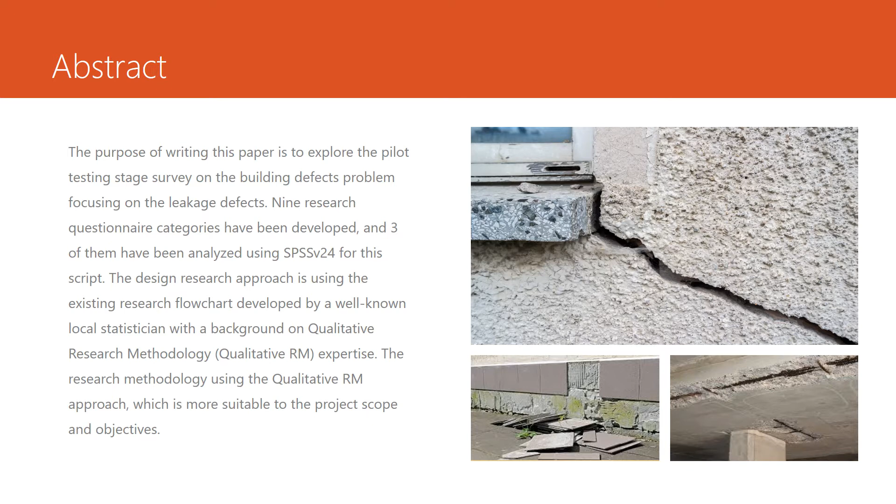The research somehow found out that BLD, building leakage defects, is the main problem within the construction scenario in Malaysia, as well as in most parts of the world, and construction players must actively participate to curb down this BLD to formulate quality buildings.

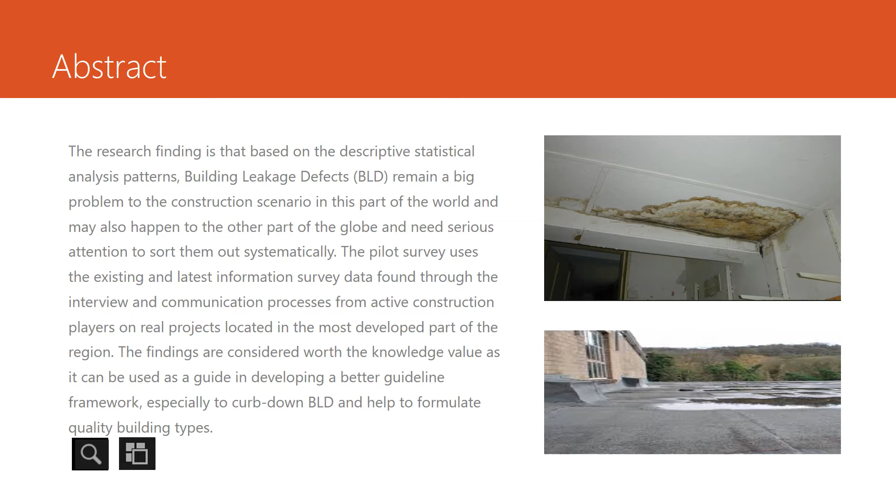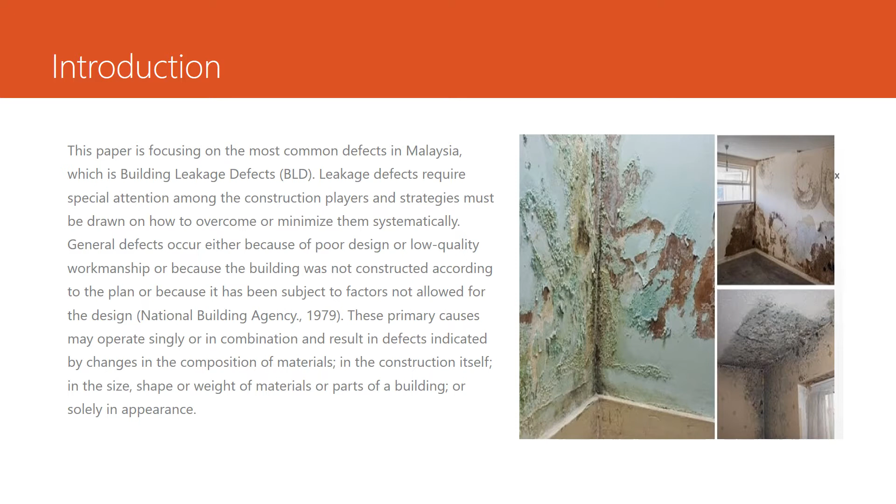From the literature research, information from the National Building Agency mentions that poor design and low quality workmanship are part of the factors allowing these defects to happen. Also, buildings not constructed according to plan is a factor causing defects. So here I use one of the local statistics experts.

This is the research flowchart. I'm using this, it's quite simple to follow, and I think it's ideal for my pilot testing. It shows how important the pilot testing is to contribute to the real survey later on. If the pilot test doesn't really work, the whole study later on, the real study, may not get a good result.

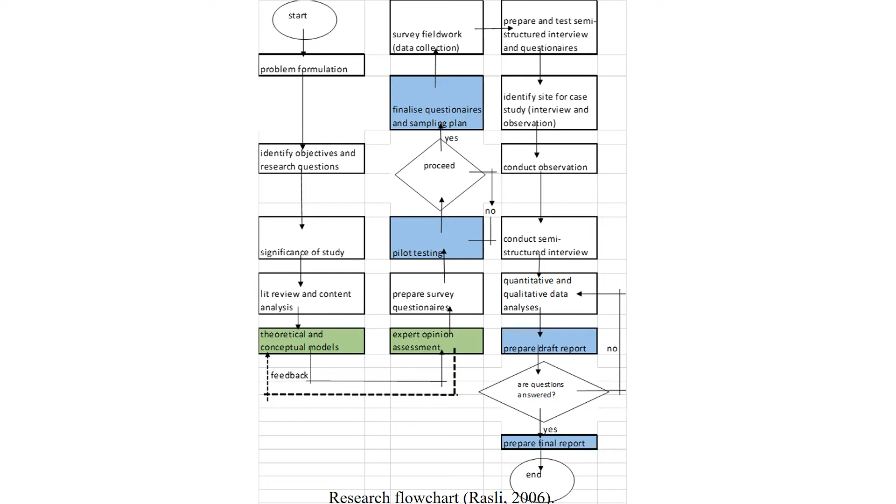This is a diagram that I've made, roughly on these 3 segments that represent the construction process, potentially generating defects: in the design phase, in terms of the product, and after the construction. You can take a look at so many varieties of the building construction process that generate defects.

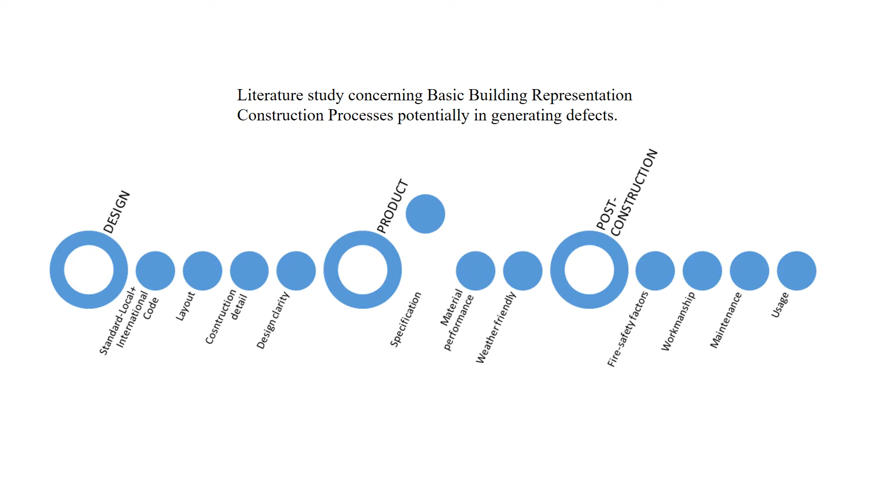These are the 9 questionnaires that I developed, targeting the industry players. For example, how these defects affected the internal areas, the cost of it, estimated value, in fact the impact on the money sector, economic factor, material use, and so on.

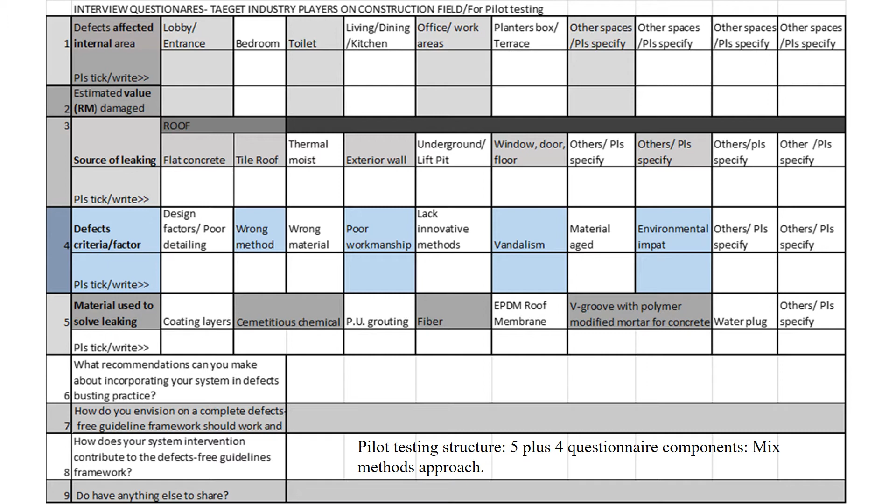This is the questionnaire. The methodology used here is mostly an online questionnaire, which is a quantitative method. This is the categories. You can have these slides, you can take a look at these slides.

The Likert scale, and then I chose 3 questions: questionnaire number 3, 4, and 5, which have a range of the projects they were involved in within a 10 year period: 5,000, 50,000, and so on, up until 1 million.

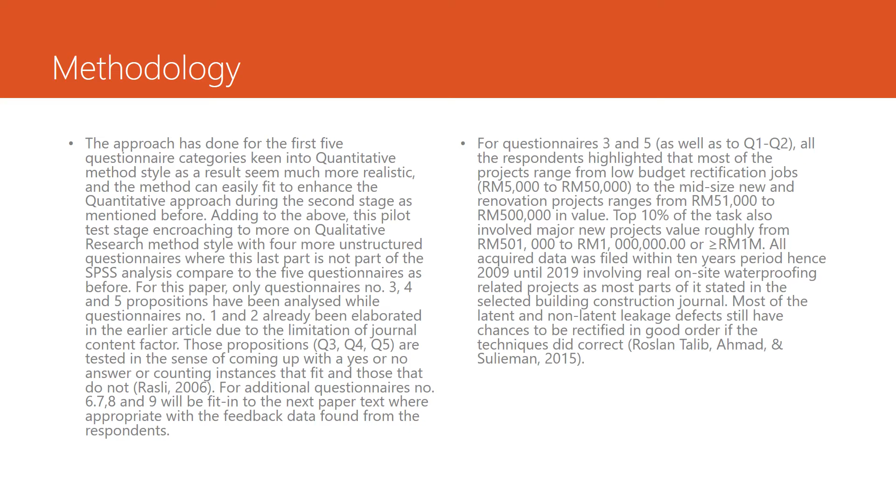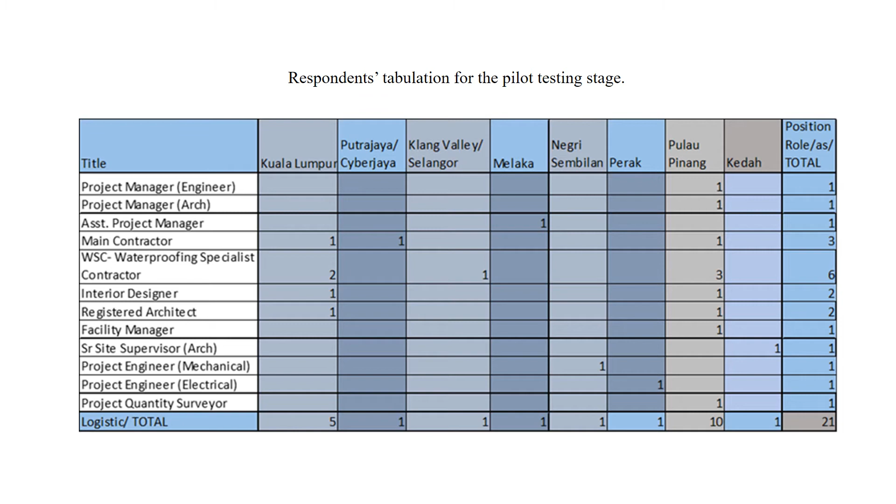We have here 21 respondents in Malaysia, most of them in Penang, 5 in Kuala Lumpur. It ranges from project managers to site engineers, site supervisors, project engineers, main contractors, including WSC, waterproofing specialist contractors, which is the highest with 6.

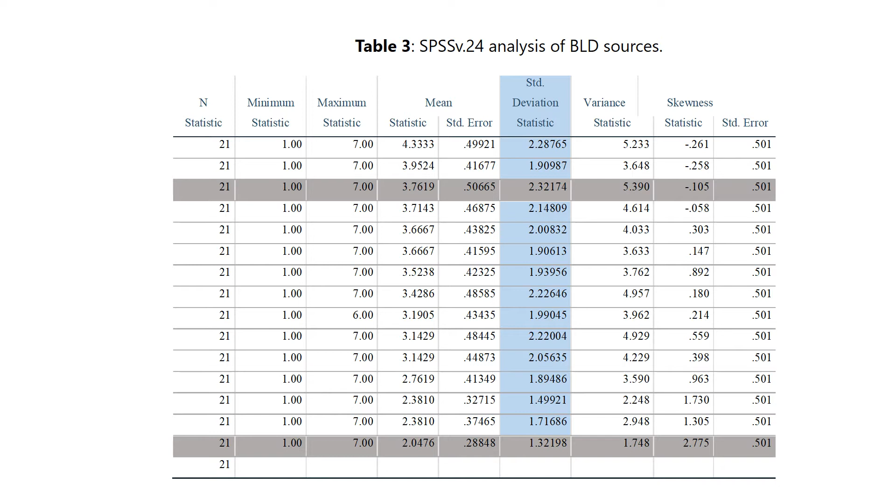Now we have table 3, 4, and 5. This is the first table: analysis on the BLD, building leakage defects. We have here the mean, the standard deviation, variance, and skewness analysis from n equal to [21].

Here is described the SD part. You can read here that the result shows spaces having roofs using tiling type roof tile have the most defect problems on leakage issues, regardless of roof using metal roofing, clay roof tile, concrete roof tile, things like that. This gives the biggest problem from this SD analysis, you can look through that.

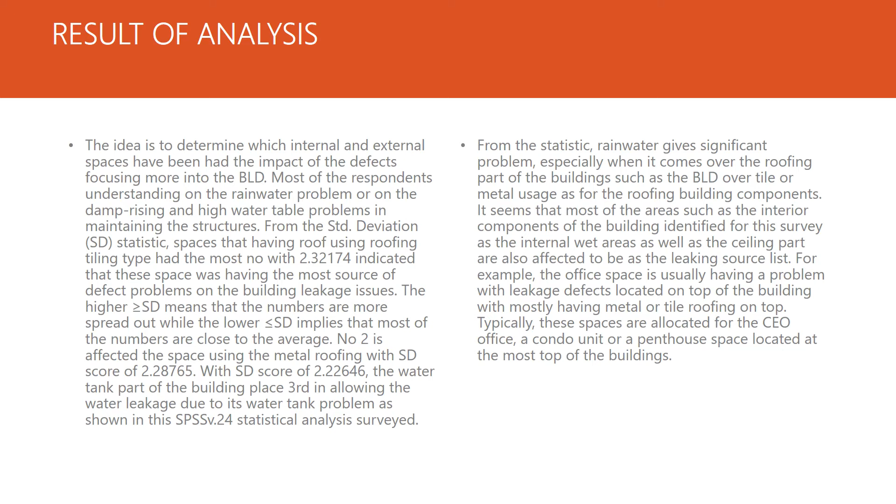Next is on this water tank part, things like that, from these 21 participants. This mean indicates, the mean study here, x equal 4.333, indicating the most problematic part is the metal roofing. I think this is because it's easily rusty, not easy to maintain.

Design-wise, not too steep, so the water doesn't really run through. Number 2 in this main study of the SPSS statistics is again external wall.

The third one is the roof tile again, with the X score of 3.7619. Seems like here the CFR, the concrete flat roof, and the aircon piping system, the water piping system, also prove to give quite a bad impact, giving more problems with defects, from the skewness statistic.

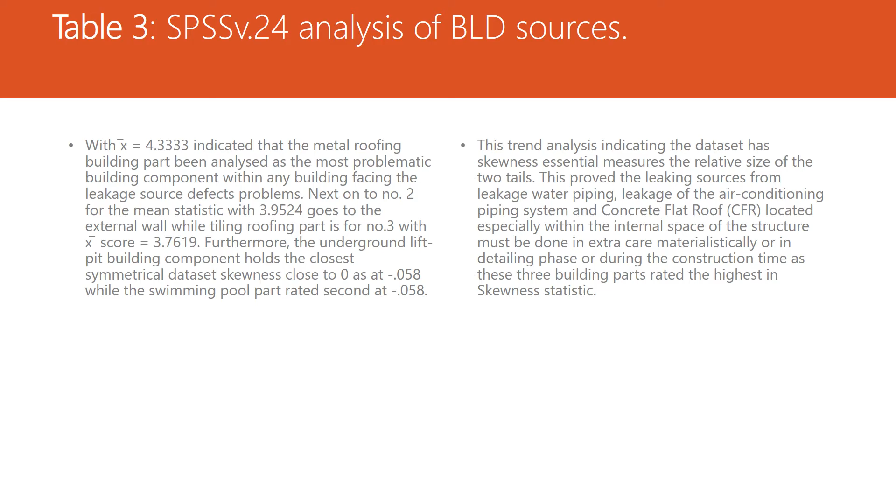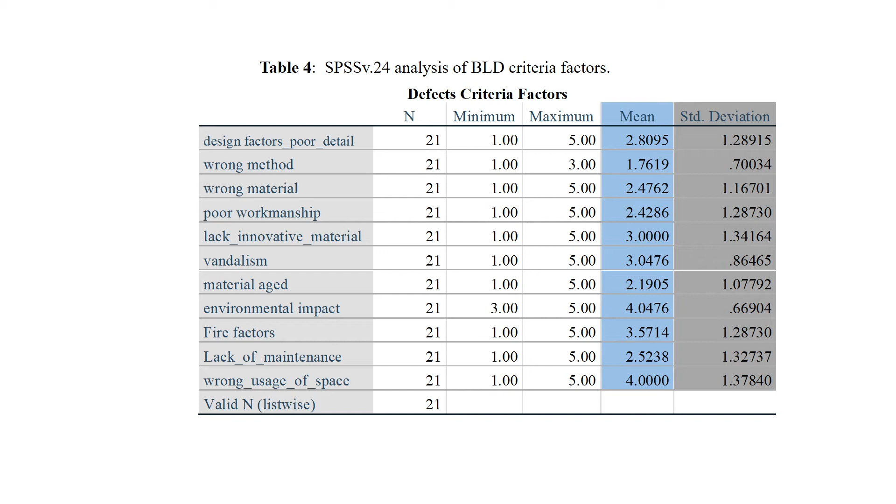The next table, number 4, is the second table, defect criteria from the BLD, building leakage defects. You can see here all the categories from the design factors: poor detailing, wrong method, wrong material, poor workmanship, and so on, including the 5 factors: lack of maintenance, wrong usage of space, meaning the designer, the architect, designs for something like an office that becomes a store, for example. So heavy material is being used, and it gives defects to the internal space.

So still maintaining n equal 21, participants equal 21. You can read here that the standard deviation shows the most things come from the lack of usage of innovative material. They don't really have a good innovative system and methods to do the details and so on, lacking maintenance, and so on. Here you can see the list.

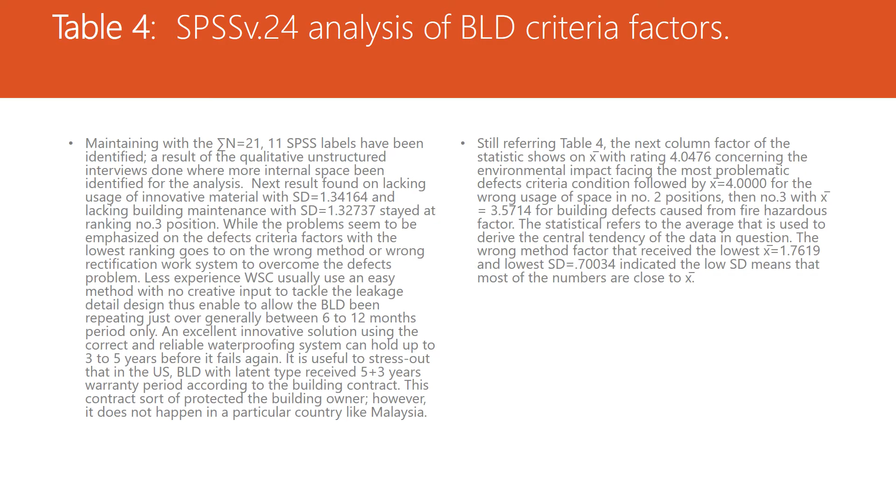This is the third one, table number 5, the last one on the materials to solve the leakage. When we have BLD, building leakage defects, somehow it's used material from coating layers: cementitious, liquid chemical, PU grouting, fiber, EPDM, V-groove, water plug.

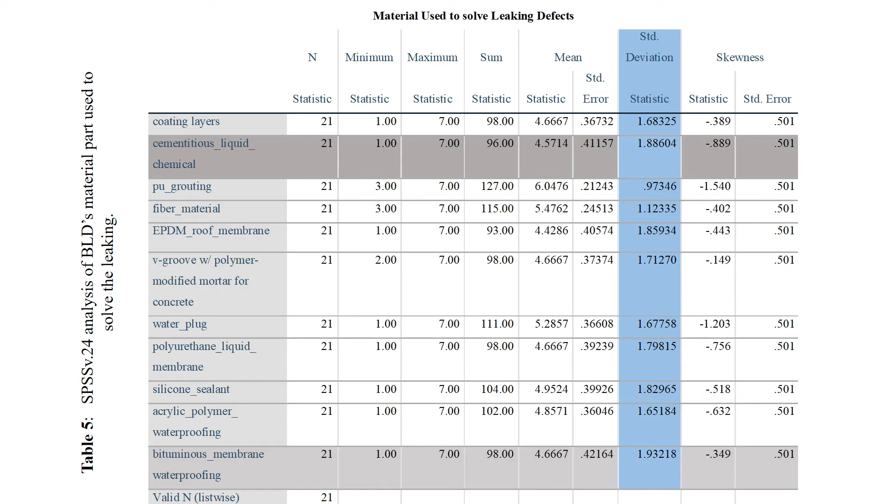PU, membrane, silicone sealant, and so on. You can take a look here, the means, SD and equation. Seems like the most problematic for the defects is BWM, bituminous waterproofing membrane, a typical material covering up the CFR, the most problematic, with the SD equal

1.93218. Seems like we have a big problem here with this membrane, as well as the next column, the cementitious liquid chemical, CLC, with SD of 1.88. So both the membrane and the liquid chemical have problems, especially on the CFR.

From the statistical analysis, it seems there are tremendous problems that the real research must look into from this pilot study, on how the CFR has been tackled, regardless whether the material comes from France, like AXTER, or local material.

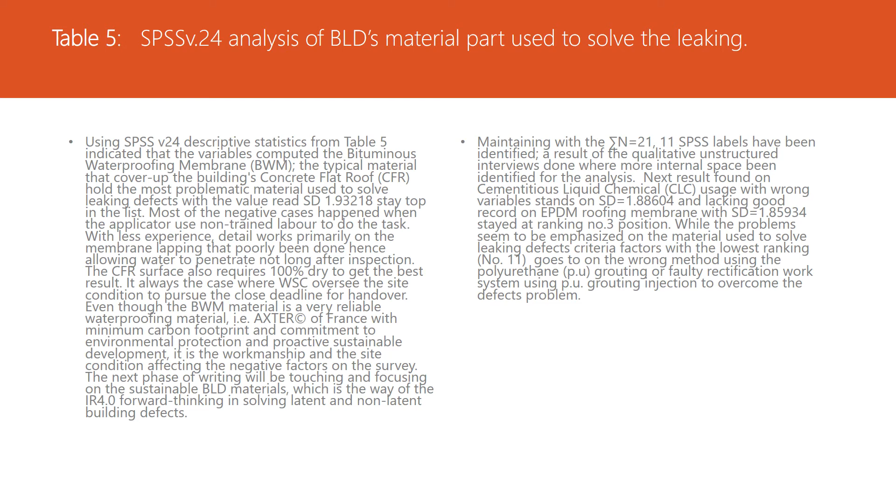You can read here again from table 5. The mean rating of 6.04 is the most problematic, the PU grouting. To me this is a temporary measure to tackle the problem, that's why it's been placed first, the most problematic one.

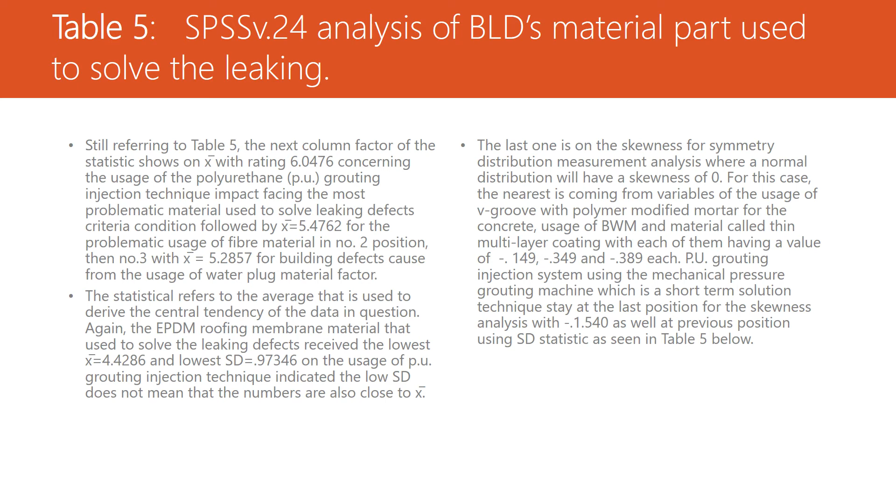And the skewness studies statistics from here indicate there's a problem with the polymer modified mortar for the concrete, and also the usage of BWM, with all these negative values: negative 0.149, negative 0.349, and so on. Also the PU grouting system still has a problem for the defects from the skewness analysis.

To summarize the discussions, it seems with a total of 37 identified building defects related components and categories, in a 7 to 5 range Likert scale measurement using the 3 tables just now, the pilot testing indicates that 80% of listed variables measured toward the deep problematic range with the BLD and LDS symptom, the leakage defects.

A total of 37 variables show 90% of it affected a defected interior space. 90% of it. And 70% found leaking defects with all the 15 categories, sources, and 11 classes of defect criteria factors.

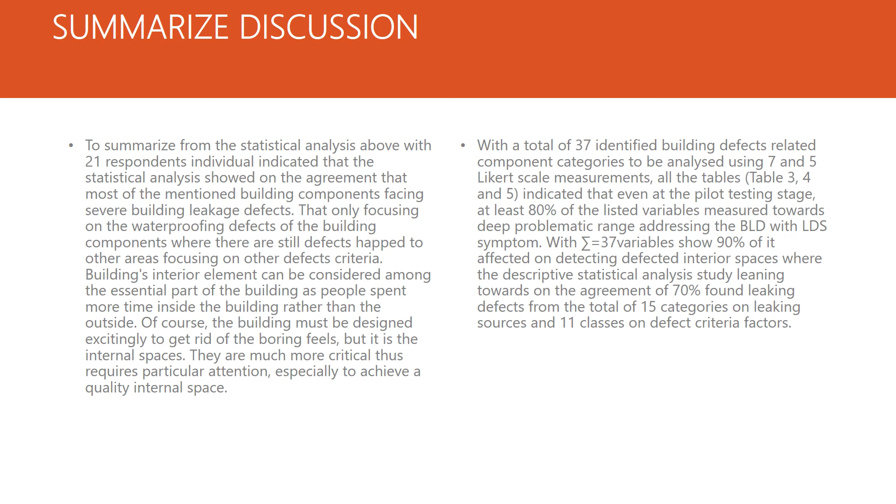So this is how important the pilot study's results are, that they can lead to the real research. Somehow it points out where to go for the real research from this pilot study. Thank you for listening.

Next, on this conclusion part, the leakage defects play a tricky game, as sometimes you can see the fault with naked eyes, sometimes not. Meaning that sometimes it's latent, sometimes it's a non-latent defect game.

It's just like currently this COVID-19. This is a latent defect, you cannot see it. You cannot see this COVID-19, this virus. You cannot see it, it just affects the people, the people die. Same thing with the defects, you cannot see it, it's a latent defect, you cannot see it with the naked eyes.

So people think that the external of the building might look awesome, the external must look good, but they spend more time to develop, while the internal space is bombarded with all kinds of defects, from all angles. This requires a change of mindset of this industry player.

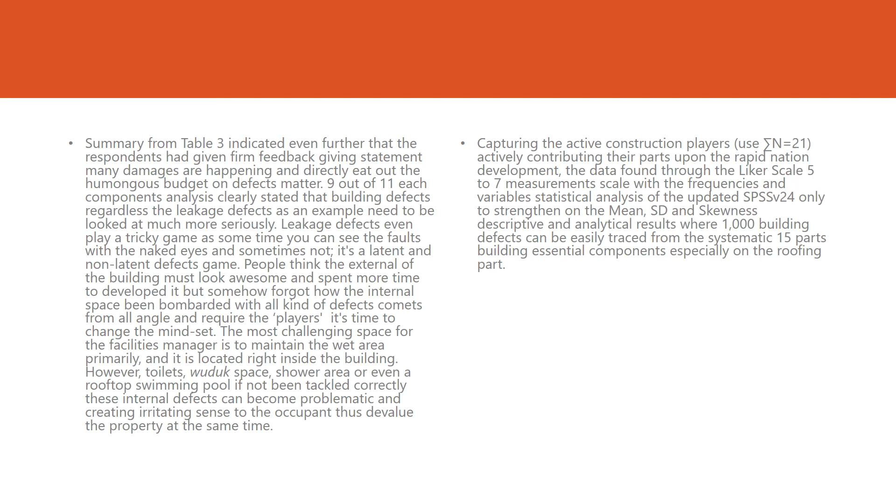You can read through that, like the wet areas in the buildings give a lot of problems. So from the survey of the 21 active contributors to this sector, the Likert scale interviews and so on, with the mean, SD, and skewness descriptive analysis result on about 1,000 building defects from the systematic 15 building parts, the building components, especially on the roofing.

Now, the last part of this conclusion is that the next phase of the study is to refine this pilot test, giving a more comprehensive structure of the real survey, either in mixed mode, quantitative or qualitative approach, and fine-tuning the conceptual model, the RQ or RO, or even the hypothesis, as Schneider mentioned in this book in 1994.

So we hope that from that three-level analysis and the selected questionnaire from those particular 9 variables, survey with the pilot test approach, the pilot test is very important to fine-tune and direct which direction the real survey, the real research of this particular topic, should take to be done later on.